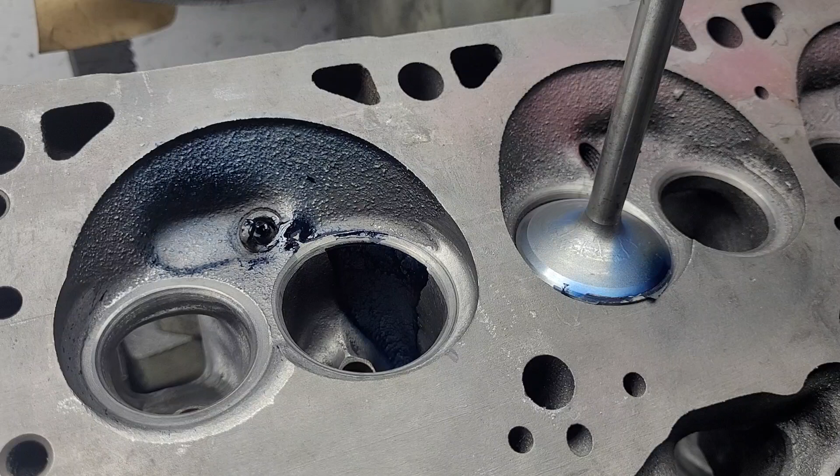Okay guys, I'm actually going to cover two cuts tonight because I have to. The first cut is going to be...

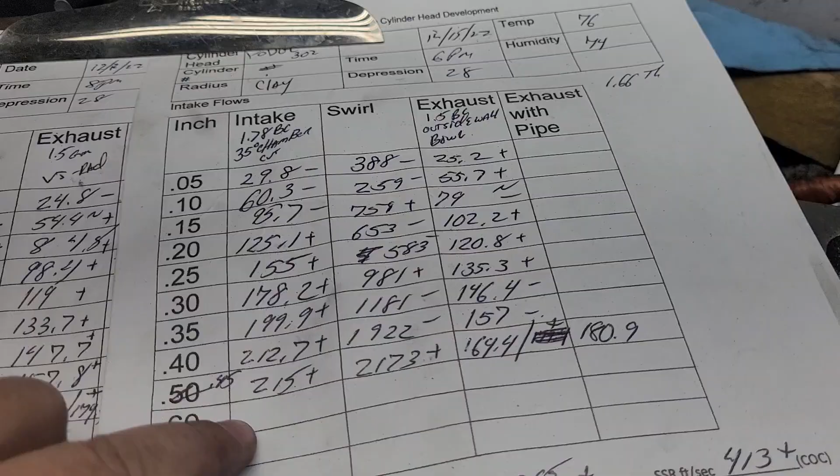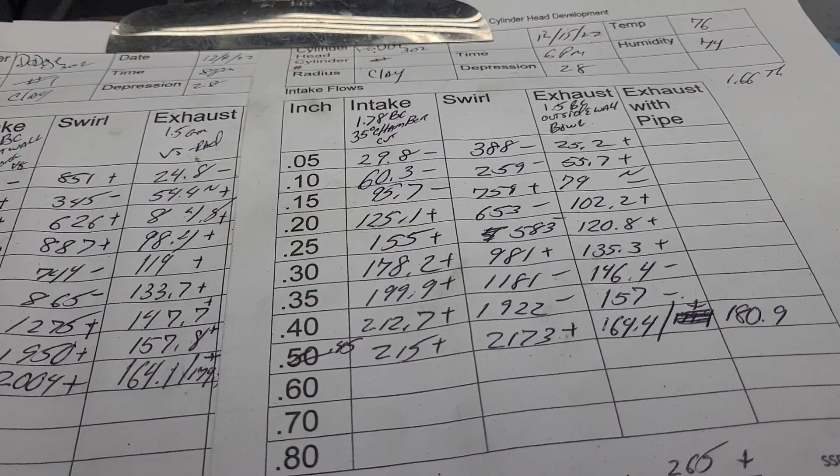This page, this is the last one you guys saw. I put a valve job on it. Valve job's not great, the guides are not perfect. And for this one, I put a 35-degree top cut on. Well, because the guides aren't great, I got more 35 on this side than this side. But I decided to test it anyway.

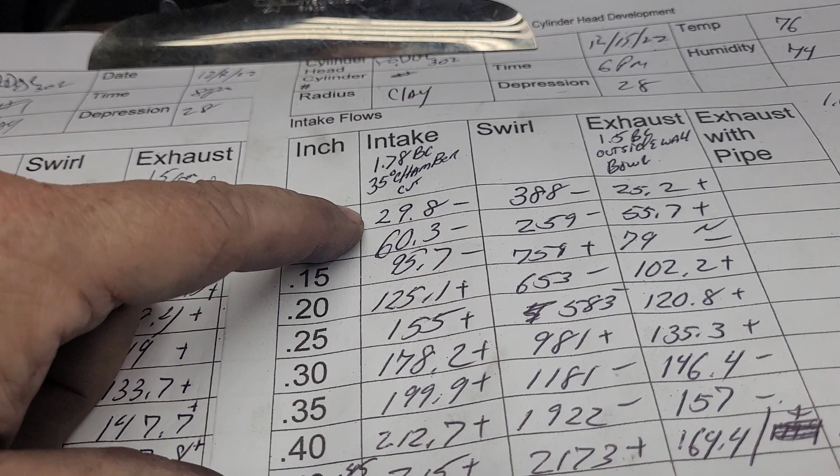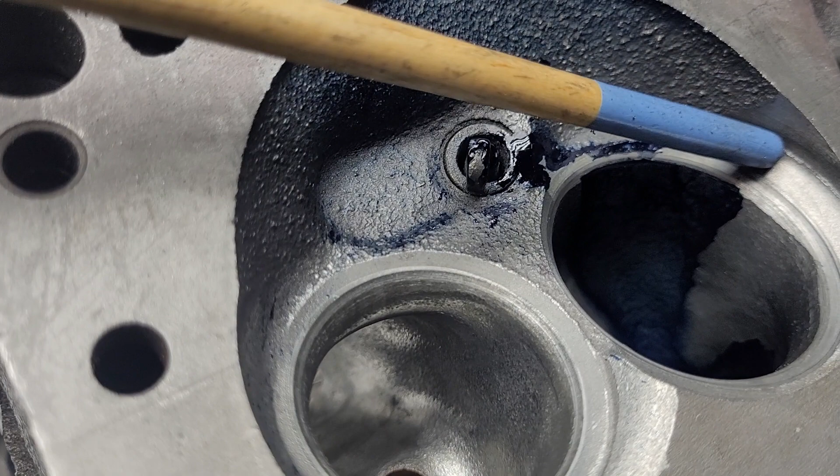So this is what we got. We got a minus, minus, minus, plus, plus, plus, plus, plus. It obviously liked it. Now I didn't really take out any more here than there already was, it just brought, sorry guys, it just brought this outside down a touch, okay?

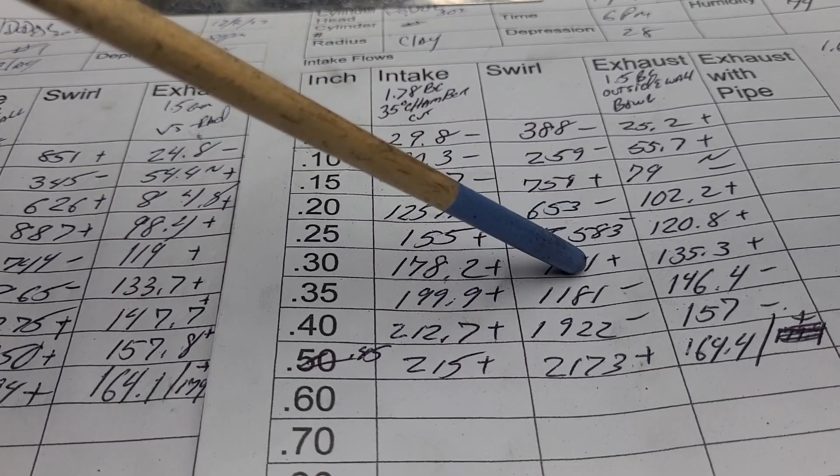Obviously it liked it. What did it do to the swirl? Minus, minus, plus, minus, minus, plus, minus, minus, plus. And it had a decent swirl pattern on it, but this pattern here was much narrower.

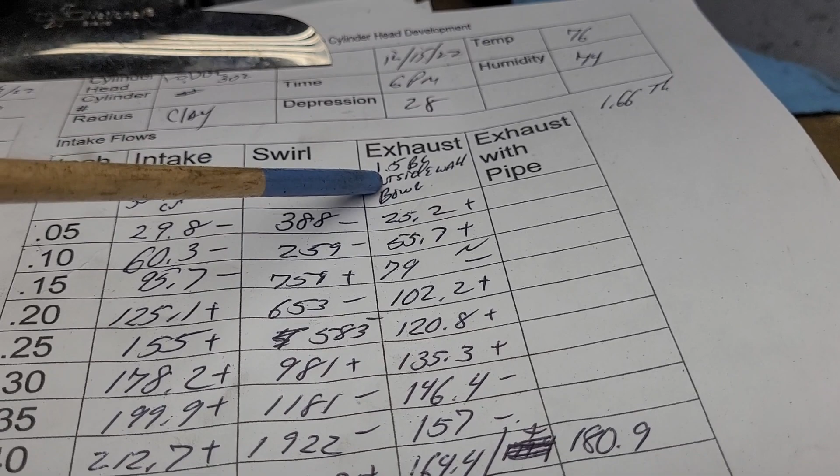Okay, let's take a look at what we did to the exhaust. I did a little work on the outside of the bowl. It liked it, it was up right in the meat of the curve. But it did like this, okay, because the speeds went up.

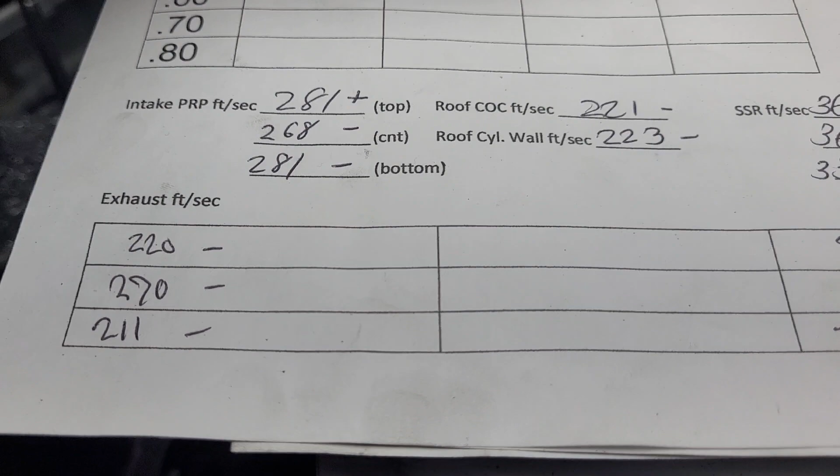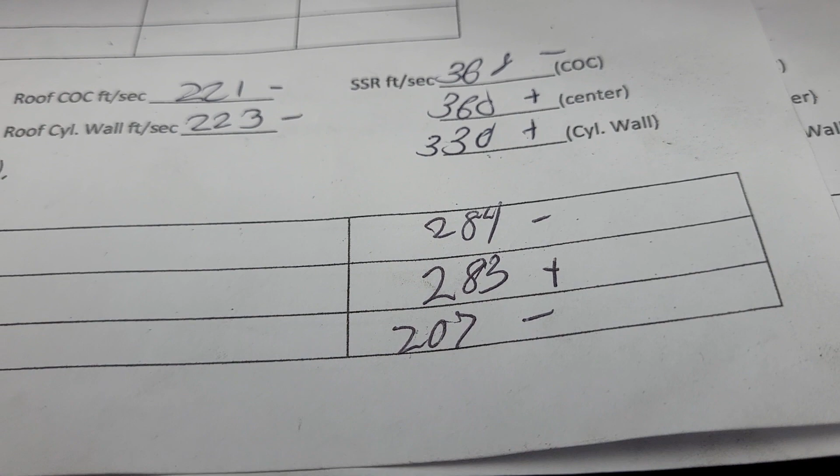It went 220, 270, 211 to 313, 293, and 230. The speeds went way up. 284, 283, 207, 303, 318, 231, right? They all went up because it was moving more air in the meat, right?

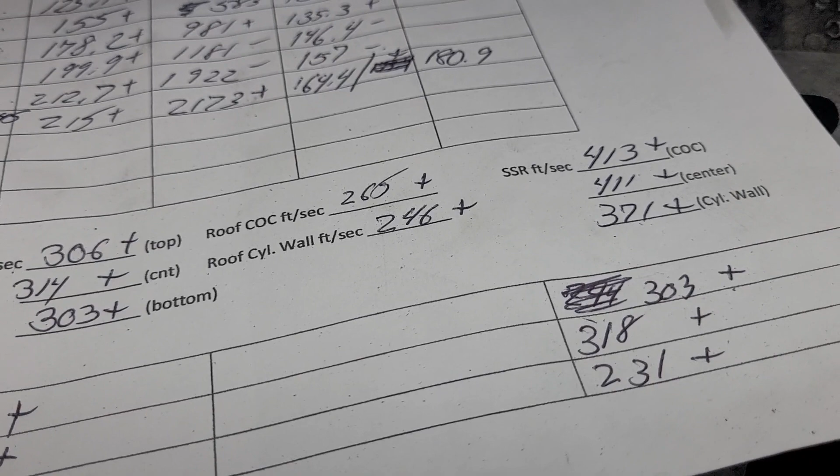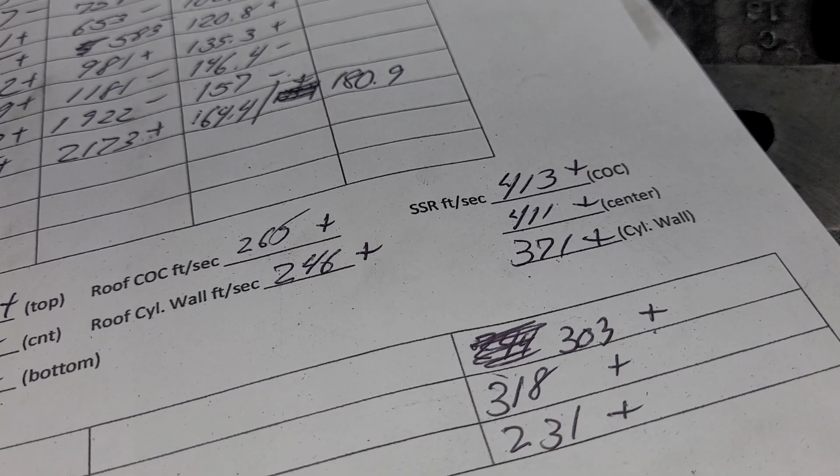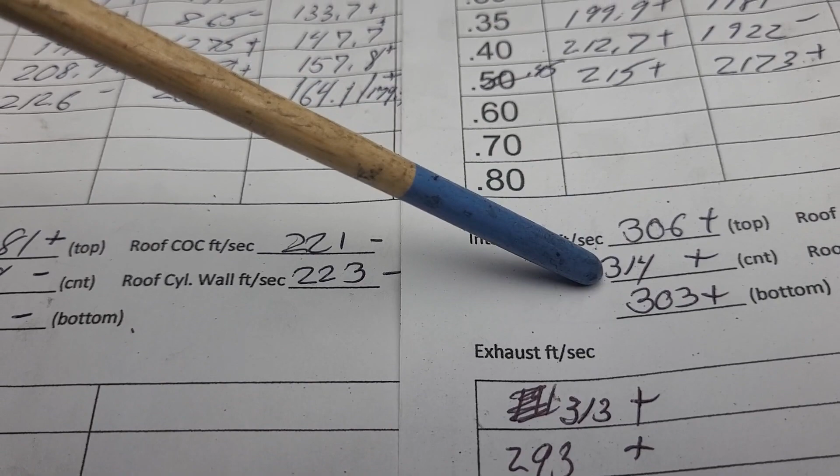So what I did is I did some work to it according to these numbers, and you'll see that on the next sheet. As far as our intake air speeds, we went 281, 268, 281, 306, 314, 303.

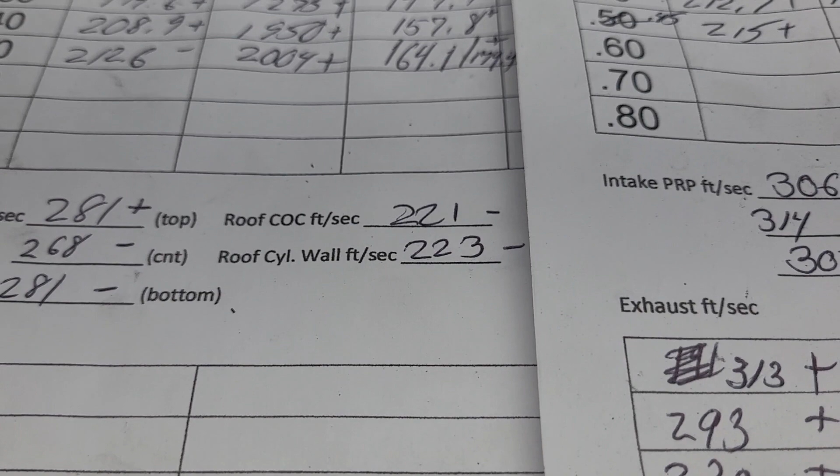It's almost time to start taking a look at that pinch and seeing if that's holding us up. Center of the cylinder, 221. Center of the cylinder, 265. Went up quite a bit.

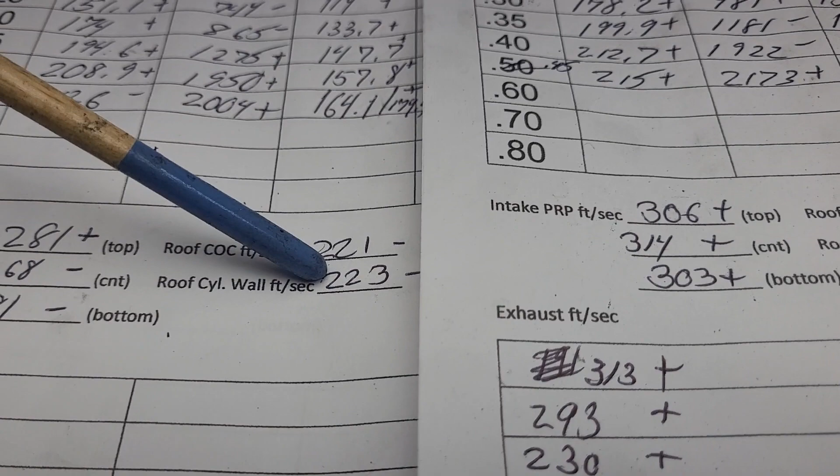Getting more flow here, made a big difference in our roof speed. Roof cylinder, wall side, 223, 246. They both went up quite a bit.

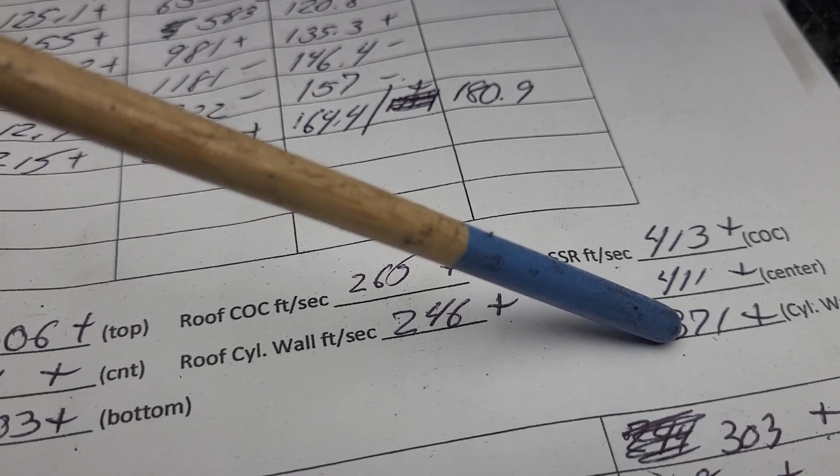Short side radius, 368, 360, 330. 413, 411, 371. Way up. Okay, so this was relatively successful.

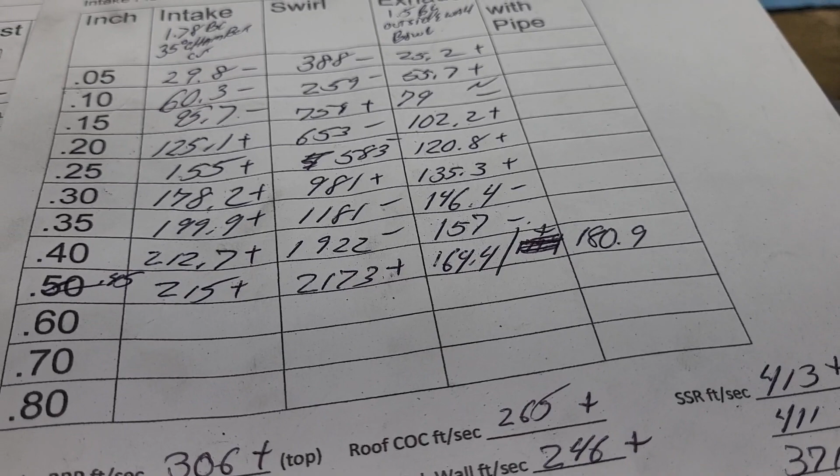It liked that 30-degree top cut, even though it wasn't even around the valve job like it should have been. Okay, so what do we do from this point?

Well, I decided to make it look prettier, not pretty as it could be, but prettier. I radius this round all the way around. I did the same thing on the exhaust, I just did clean the radius a little bit. And I moved one of the walls of the exhaust port according to my air speeds.

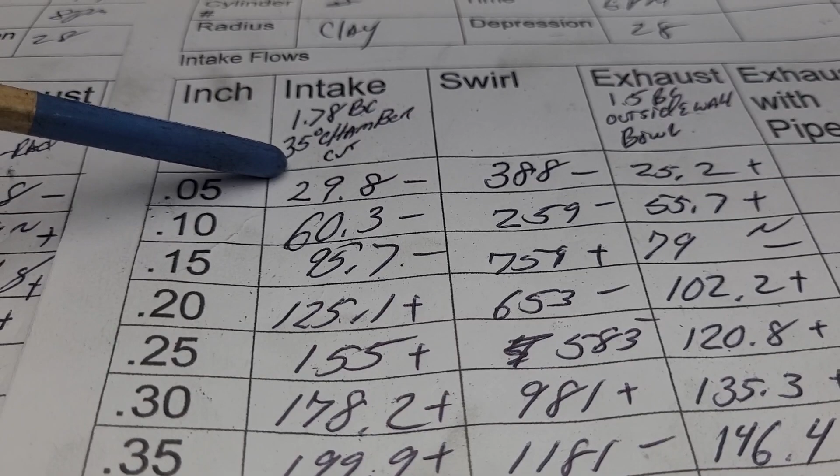I think that's all I did. I used the outside wall on the bowl.

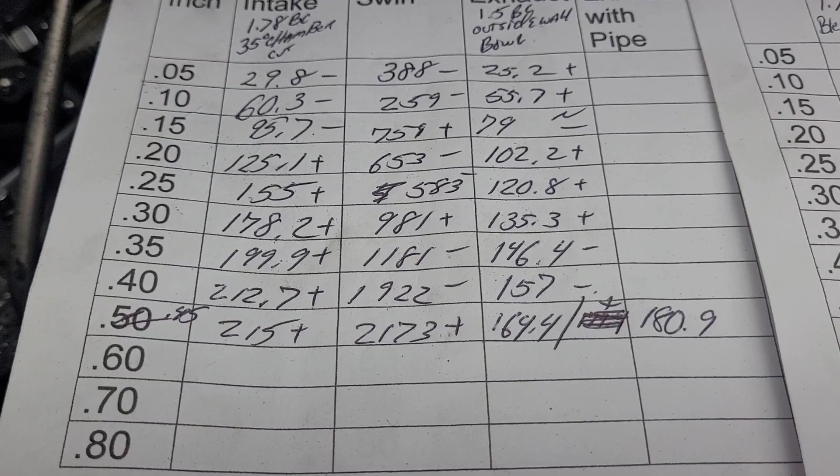Oh sorry guys, we got to go to this sheet now. Okay, let me get it set up. Okay, this is the sheet with the straight cut. This, I blended the 30-degree top cut, wider center of the chamber wall, and I did my little radius on the chamber.

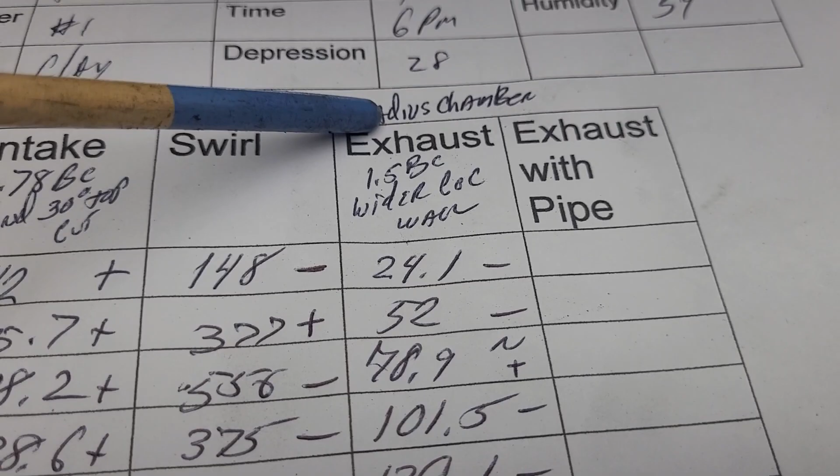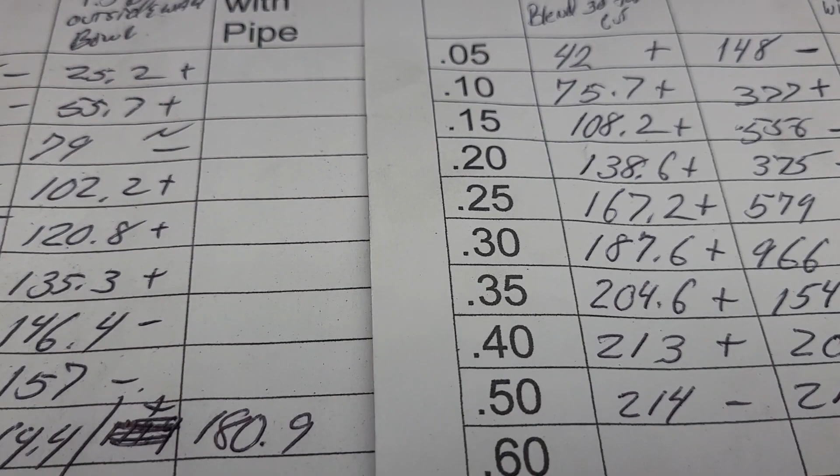Well let's see how we did. Take a look at our low lift flow over here versus over here. Huge step up, so much of a step up I'm really thinking I may need to redo this test because something's not right somewhere, right?

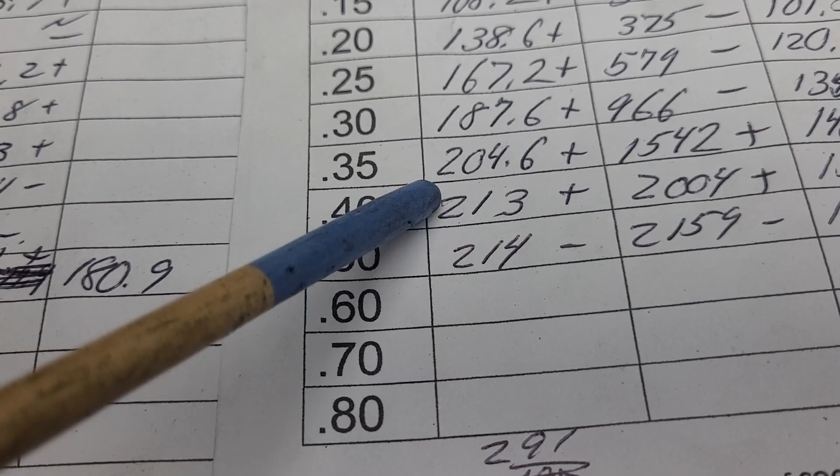But I like what's going on. It went from 75.7 to 108 and change. Up, up, up, they're all up. 138.6, 167.2, 187.6. Way up. At 0.35, we're over 200 already.

Over here, we were just making 200. Oh wait, you know what? It works better at the lower lifts and not so much at the higher lifts. In fact, it didn't even max out. This one was 215, this only got to 214.

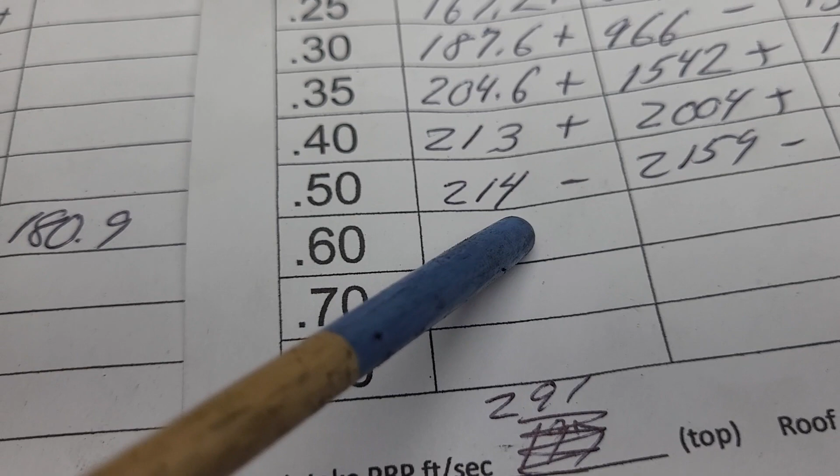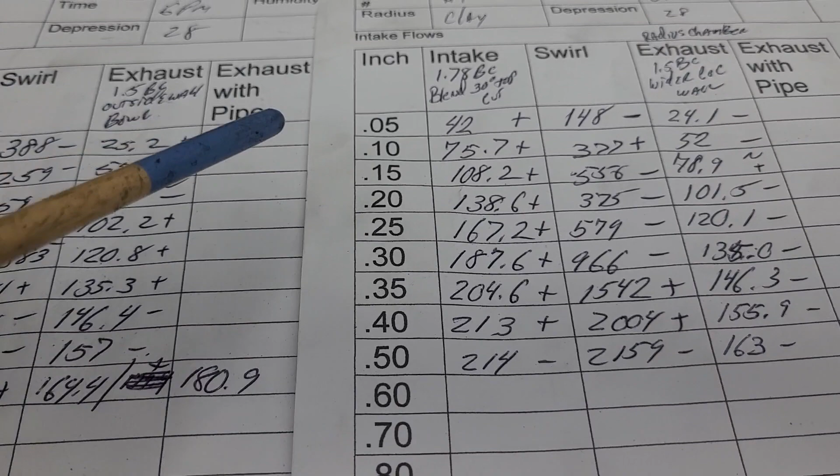Take a look at our swirls. Over from here to here, right? Minus, plus, minus, minus, minus, plus, plus, minus. You know, I don't like it fast in this area, so this is actually, to me, a better swirl curve.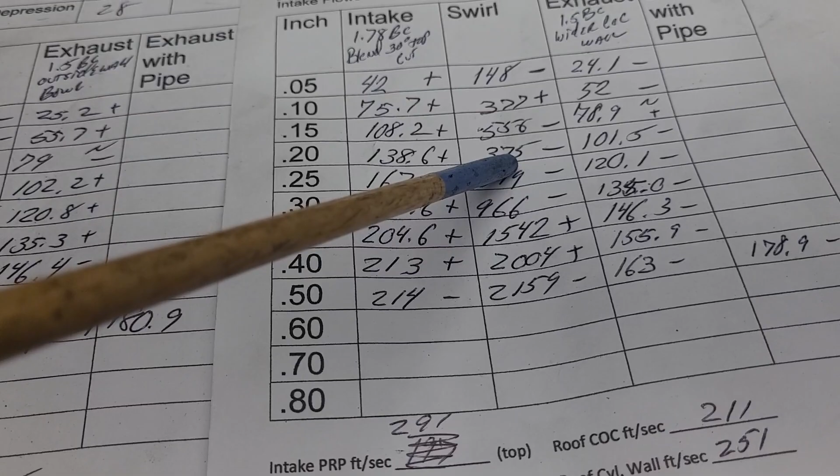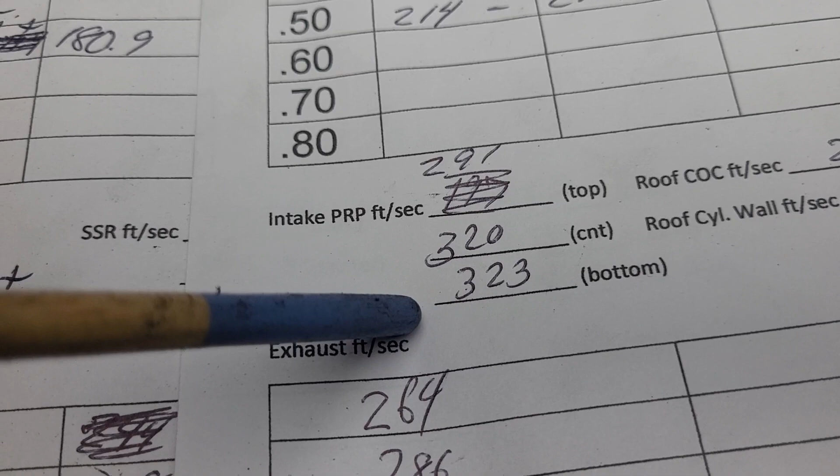A quick look at our speeds, right? Push rod pinch. 306, 314, 303. 291, 320, 323. So it's sped up on these two, and it's slowed down on the roof.

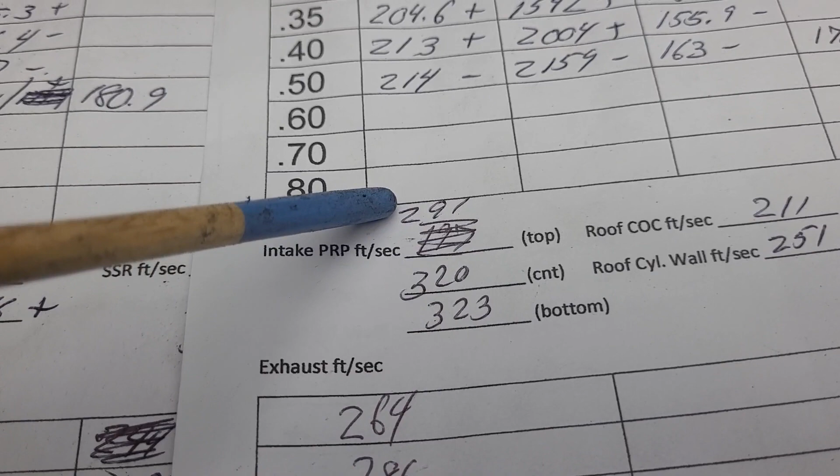That's kind of interesting, right? I need to think about what's going on there. I'm not 100% sure. Okay, take a look at our roof.

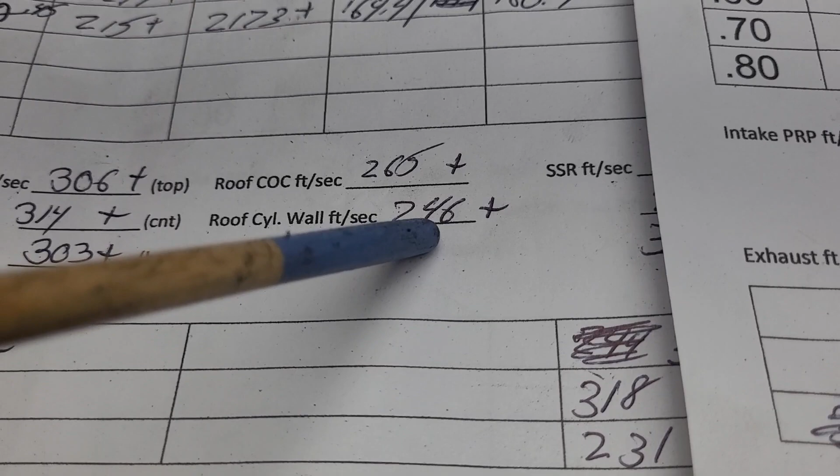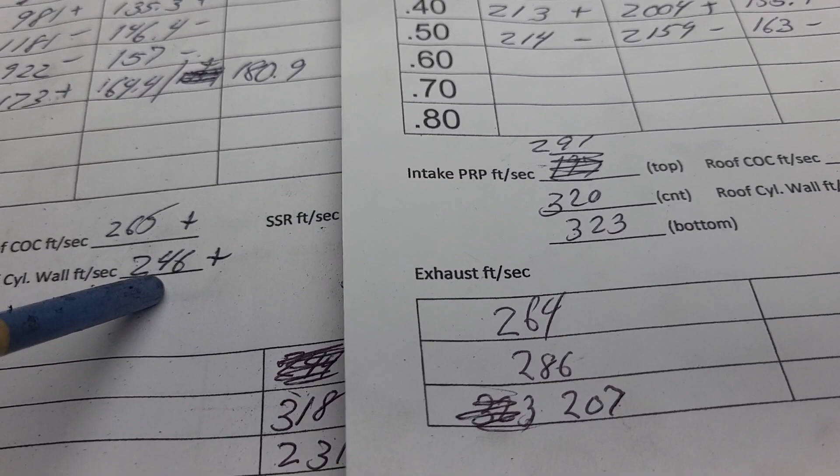It went from 265, center of the cylinder, to 211. Huge step back. Roof cylinder wall side, 246, 251. This side started passing way more air, right? That's what I see when I see 246 to 251. But the other side isn't working as efficiently anymore.

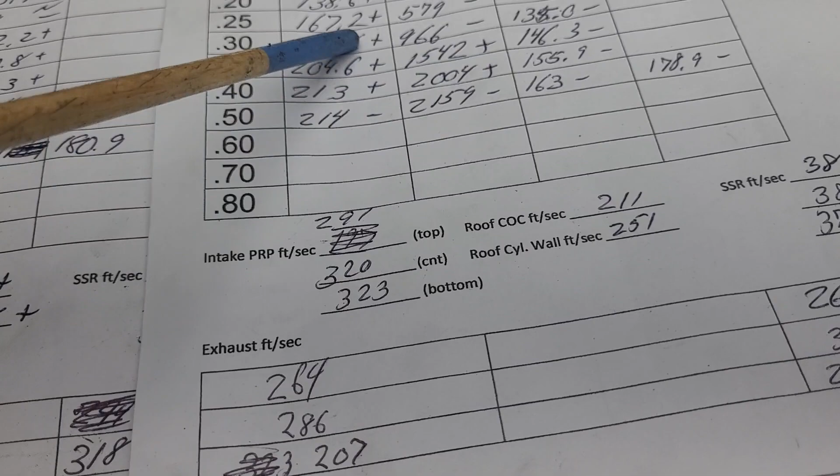But I do like this flow curve better, so I'm not going to sweat it. A lot of Chevys don't like this radius right here. They like literally a top cut and a very tight radius, and that's it. That works best.

These, you got to remember, the ports are deeper, right? So the air is coming out straighter. It really seems to like this. So I have a feeling that's going to stay.

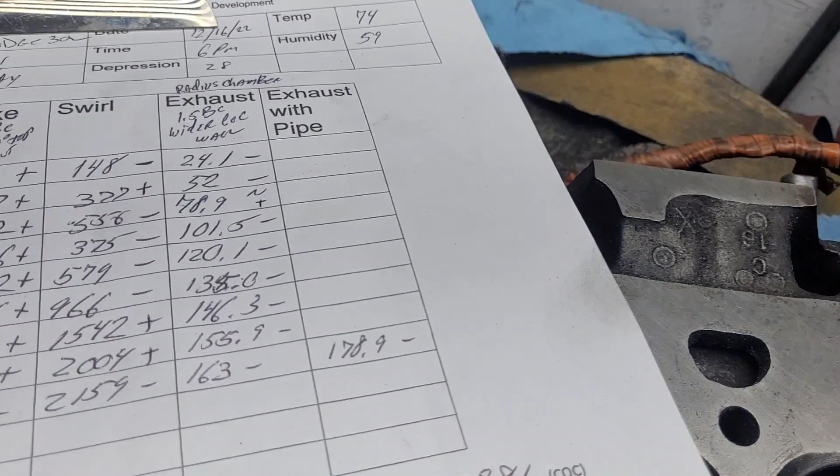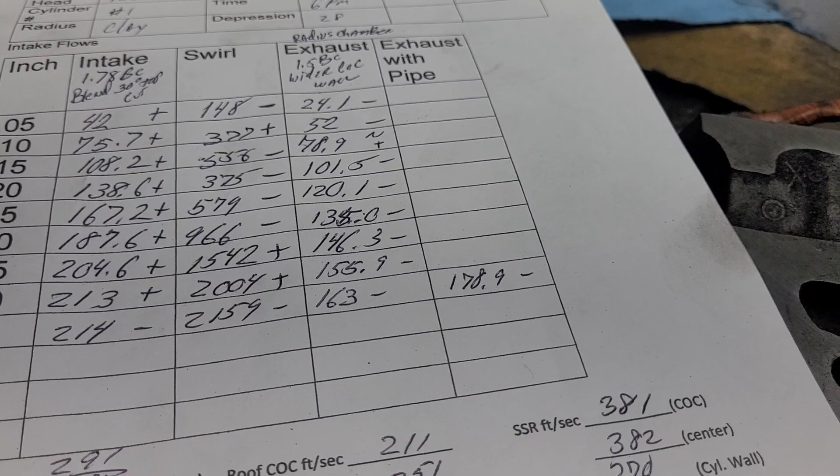All right, take a look at our exhaust. So what I did is I took some metal out of the center of the cylinder wall, according to my air speeds. I thought it needed some more area on this whole wall. So I took a little bit of metal out of that whole wall. It's not super thin, so it's good to go. Minus, noisy, but it's plus there, only a bit.

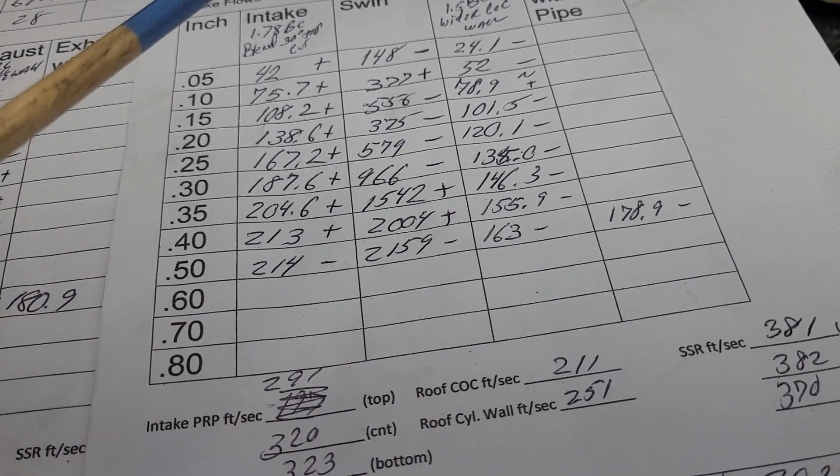Minus. Not good at all. So it's a bigger port that flows less. That's a step in the wrong direction, okay?

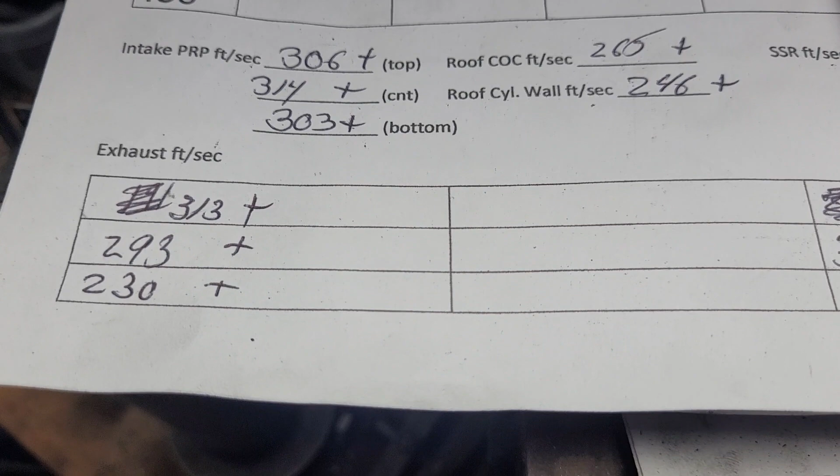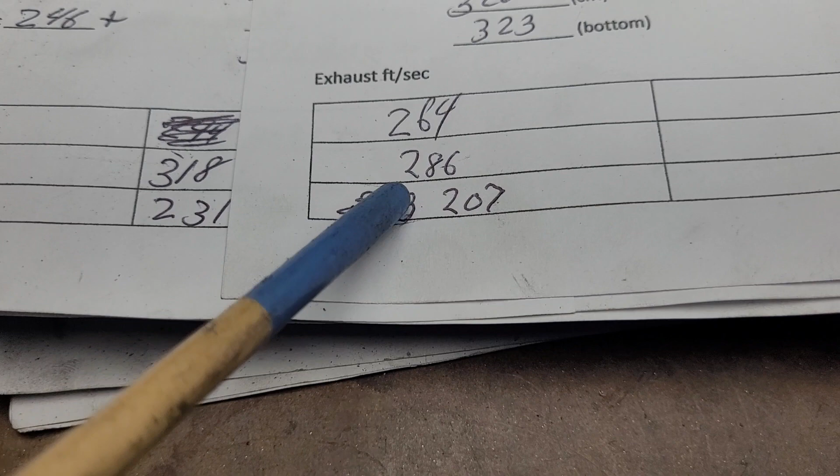Let's see if we can figure out what's going on according to our air speeds. 313, 293, 230. 264 went down, 286 went down, 207 went down. Now, of course, we have a little bit more area, so the air speeds are going to drop a little bit. But we're also moving less air.

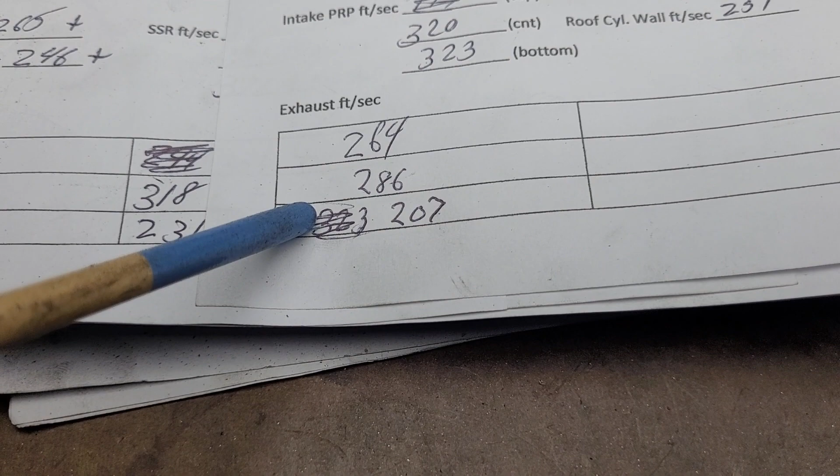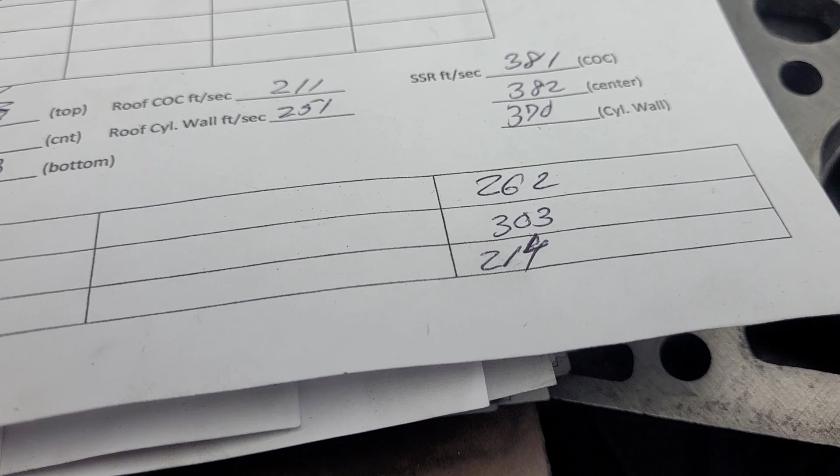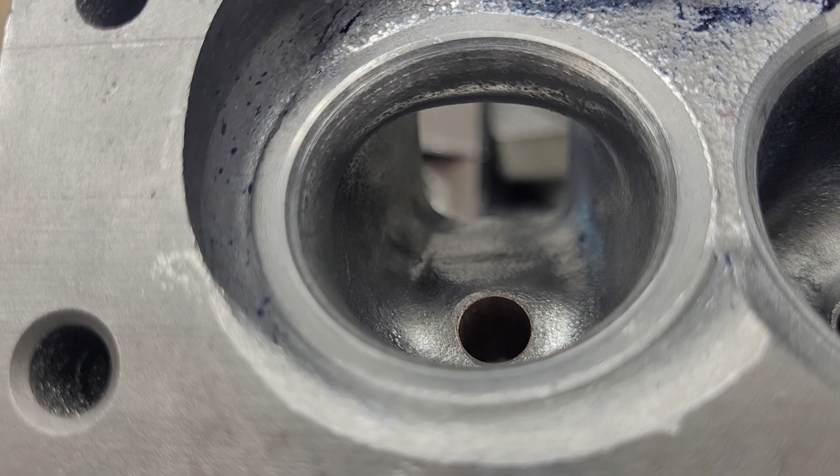Okay, this side: 303, 318, 231. Down, down, down, okay? Not great. So I need to think about, is it possible that the exhaust doesn't like this radius right here? It's possible. It's more likely that moving this wall, even though it was only a few thousandths, wasn't the way to go. So, you live and you learn.

So next one, I won't be taking as much out of that side. So I think I know what I need to do to check that out and get that better.

So let's take a quick look at our liquid. Our liquid flow is really quite interesting. Let me grab a little light. Take a look down that.

That is pretty cool. Right there where there's no liquid is a little too thin to take any more metal out of. I would like to take it out, but I can't. I'm at my limit. Take a look at the valve.

The valve has got a really wide pattern on it because this section is flowing a lot better. So it's pulling the liquid up. You can actually see it right there. It's pulling the liquid up.

How about the chamber? We've got blue. We've got blue all the way down to here, to this edge, all the way around. And then we got splatter. We got splatter literally to here. That's how far we've got splatter.

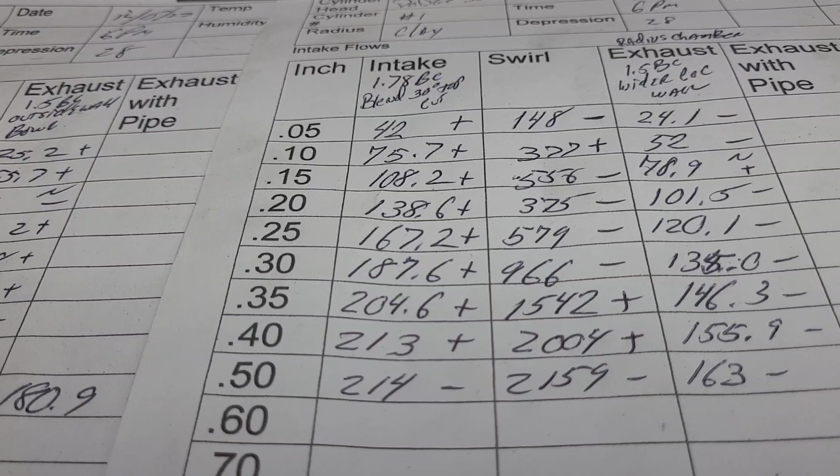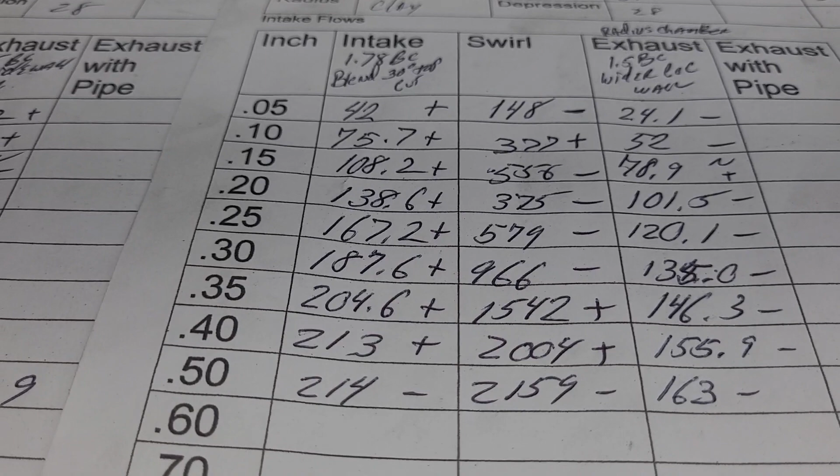So as far as liquid, I think we're doing really well. I like that. I actually like our curve right now as far as our intake. Yeah, I'd like to get another 35 CFM out of that, but I'm not sure I can do that with this size valve, because unfortunately these have old porting on them and the throat ratio is already, I think, 92.

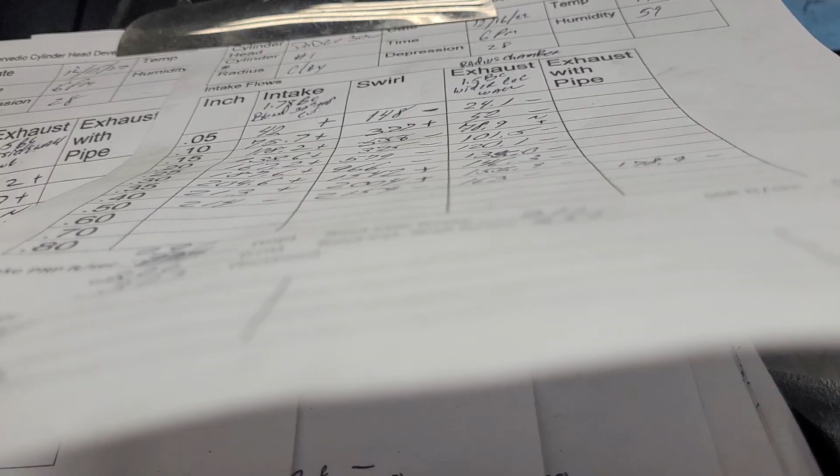I actually calculated that on one of the sheets. I thought I did. Sorry.

Okay, you can see down the port. It really hits that bulge in that wall hard. I'm about at my thickness level, so it's gonna have to stay. Got nothing on the rest of the port. The rest of the port is clean as a whistle.

All right, guys, time to start looking at where else the restriction is. I have to measure that pinch. That might be it. I mean, I can still take some metal out of the center. I can do that. This wall is basically done.